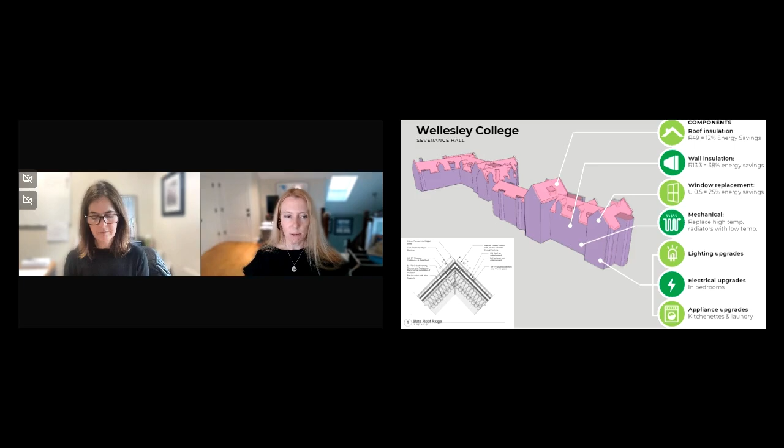So we broke the envelope down as a part of this study, and other aspects of the building, into particular components. We developed an approach and said, what if we upgraded the roof? What if we insulated the roof? What if we insulated the walls? What if we replaced the windows? What about mechanical moves, which we'll talk about a little bit later? Electrical upgrades, appliances, all these questions in terms of energy inputs. We developed sets of details and approaches to these questions, which were then taken to a CM and looked at in terms of price. And we did a whole life cycle cost analysis to try to figure out what gave the best return on investment in terms of energy use reduction versus cost.

So what we ultimately ended up deciding was the best approach, based on a whole life cycle cost analysis, is what you see here on this slide relative to envelope. There were really two big keys to this. The first was about insulating at the walls. We should be really clear that this was insulating at the interiors of the walls, because of course these are historic buildings, so we couldn't modify the exterior appearance. We can't overclad these buildings, and we can't strip off the existing envelope and change it. So we were working on the inside.

And the other piece was looking at the windows. The age of the windows and the type of the windows meant that replacement was going to be extremely expensive on a per window, per square foot basis, however you looked at it. We determined that we could get a lot of value out of window repairs, sealing at the windows, and installing interior storm windows. That really greatly reduced things like our air infiltration, which is one of the biggest places where you lose heat in a building. All of those things together enabled us to create a 43% decrease from the median dormitory energy use as a result of these efforts.

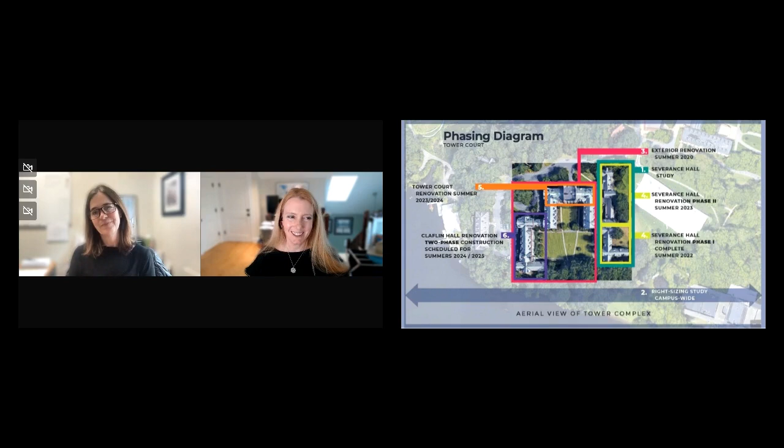As Michelle intimated, there was a lot of work that had to be done in a very short period of time, twice, right? So we had to deoccupy the building, work on the building, get the heads back in the beds. And the work that was done was very varied and touched every aspect of the building while still not being a gut renovation.

It's a lot of late nights and a lot of effort, but in the end, you do get through it. We also, at Severance in particular, of course, there's all the work at the interior.

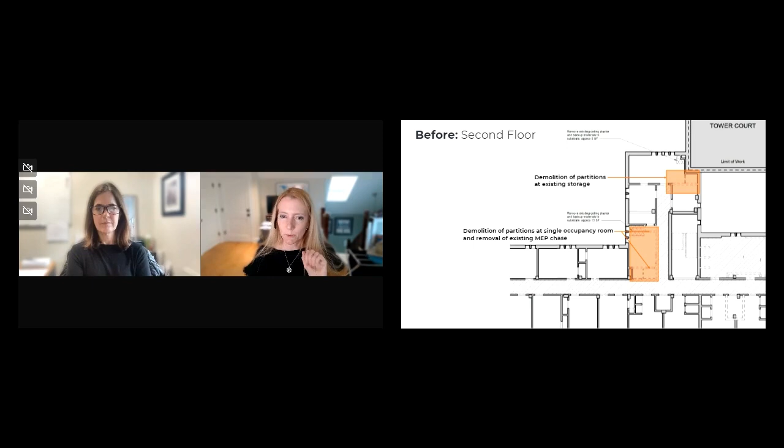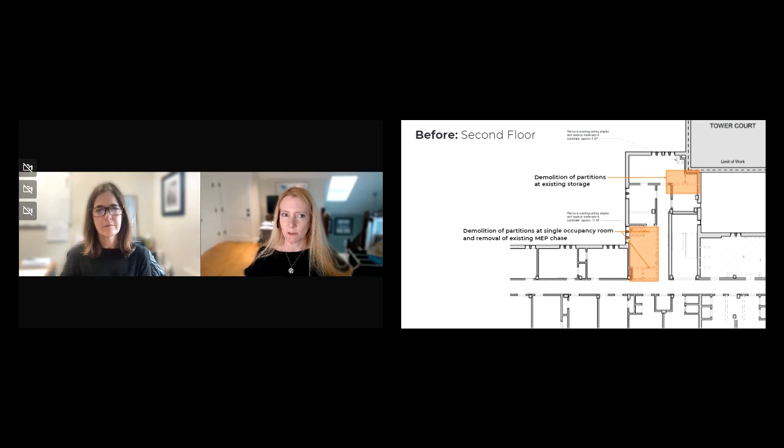While we were at it, you may have noticed there was that last little bullet point on the deferred maintenance slide that talked about the goals Wellesley had for these projects. One of those goals was, where we can do it, let's make program improvements, right? That wasn't the driver for these projects. The driver is things like energy, deferred maintenance, accessibility. But through a little bit of creativity and looking at occupancy, which we'll talk about later, you start to make small design moves that do change aspects of the building.

So you have to imagine that this space is just blank, right? You have this long corridor one way and a short corridor another way. And all of a sudden now you have an open space where students can gather, and it's a little relief valve from this kind of long double-loaded corridor, which really just has to do with how the building is constructed. It also brings light into a space which otherwise wouldn't have as much light. And in the same vein, we always were looking for these little moments—where can we make change?

So for instance, at the first floor, there was a space that was no longer utilized for what it had been, which is this former residence director apartment. There's been a change to how Wellesley handles residence directors, so this space was literally unused. And when we were thinking about res hall rooms, this didn't seem like a very good spot to put a resident because it's literally in the path of travel of all the folks who are coming into the building, who are the residents and visitors.

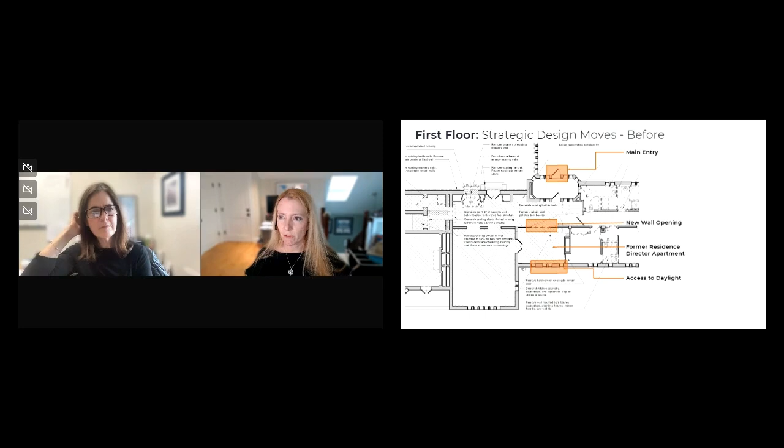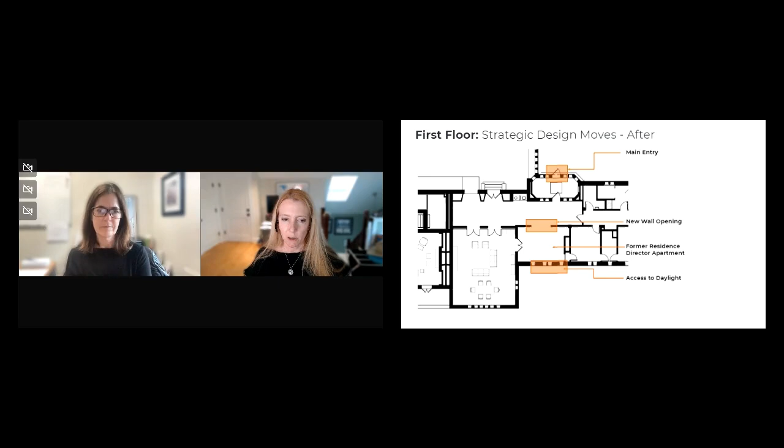We saw an opportunity to create access to daylight, because before when you came in, it was all dark. So now, through capturing this space from the former director's apartment and a new wall opening, we were able to create access to daylight and a very different feel. This is what it was like when you came in the door before - you looked, and there was the morning room over there on the left, but it was very dark and closed in. Now when you come in, you have access to a space where students can hang out, and that space has access to daylight. This was not a lot of work to do, and it fit within all of the other deferred maintenance and accessibility goals and really made a big impact in terms of the student experience.

Another big impact for us was how we were going to address accessibility, ADA accessibility. For folks who may not be from Massachusetts, our governing regulatory agency here is called the Massachusetts Architectural Access Board, or MAAB. They recently adopted a process where they'll work with campuses, places that have housing across a large piece of land, and create a housing plan that can address accessibility at a more macro campus-wide level rather than building by building. This was a game changer for our 10-year plan that we were putting together for residence halls.

Every other time we had tried to tackle the problem of upgrading our residence halls, because they're so old, because they're architecturally really interesting but very difficult to make accessible, the cost just kept increasing, and we had less money to do deferred maintenance, and all it was becoming was accessibility, which is not a bad thing. But again, in these balancing priorities, we just couldn't seem to create a plan that was financially feasible and giving a level of upgrades that would really make an impactful difference.

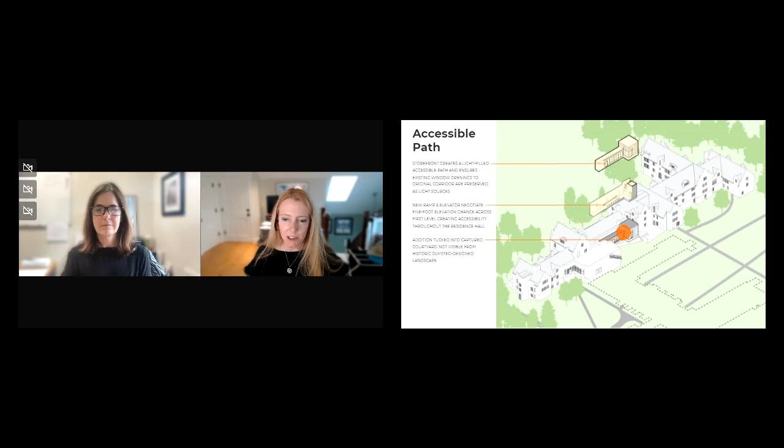The way we approached it was through the creation of a small addition tucked into this little spot, hidden within an interior captured courtyard. This courtyard is what it looked like before, between Severance Hall and Tower Court. This is a spot that unless you know how to get to it, you wouldn't necessarily ever go there. So this became the perfect location to create something that could bridge the gap between these two sides.

Again, this is the northerly end, the southerly end. You get a sense just by the heights of the buildings here of how much topography change we're talking about navigating. So we created this small addition that got you to an elevator that navigated the difference between the location where you come into the building and the southerly wing.

It had a lot of benefits beyond simply creating accessibility, because this corridor was still going to be the main way through the building and between these two wings. Locating ourselves next to it created about as universal an experience as you can get for someone who's mobility impaired versus someone who's walking through this corridor to another set of stairs, because you go through the same archway.

You can see how we navigated this. We removed a couple of different sets of stairs, created a new one, and then created a ramp that takes you over to this end of the addition where you get to the elevator. So you have to be really, really creative with these moves in existing buildings when thinking about accessibility. But there's always going to be that one piece that unlocks the puzzle, and this was the piece that unlocked that puzzle at Severance.

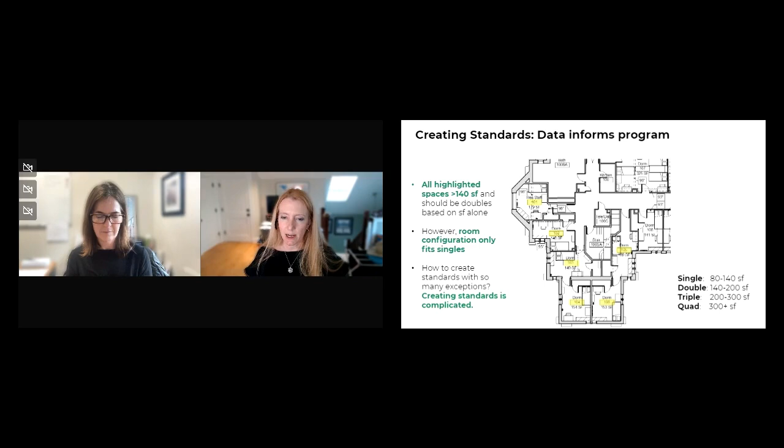And so we wanted to say, okay, how can we really make this happen? So to understand that, we began by literally going into every single room in every single residence hall on campus and understanding the existing conditions. We highlighted, where are there risers for MEP systems?

Where are there radiators and different heating units that bump out into the room? What about furniture types and how they affect things? And funny existing conditions such as head height in rooms, for instance, varied a lot because you sometimes had sloped rooms, sometimes you had turret rooms, sometimes you had shorter dropped areas down at the windows for bays. So we had to catalog all of that. And we recorded all of that information on plans and laid all of that out.

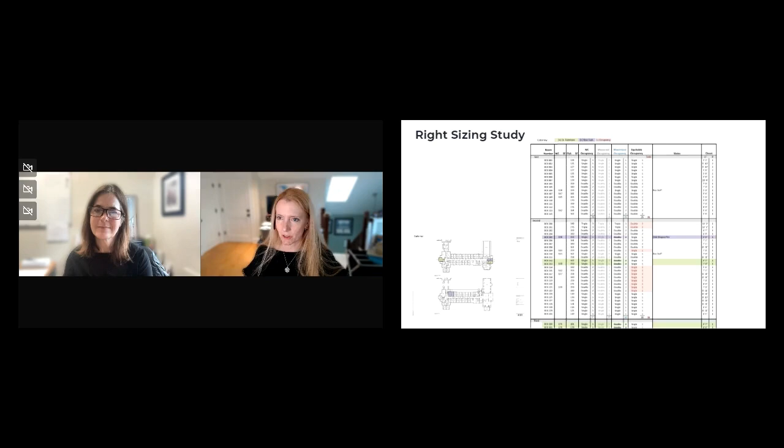But additionally, we then ended up creating some of the world's largest spreadsheets that listed occupancies for all of these rooms with different aspects to them. So for instance, how many students could you put in this space with the constraints using the existing furniture types that Wellesley College had purchased and was located there at the moment?

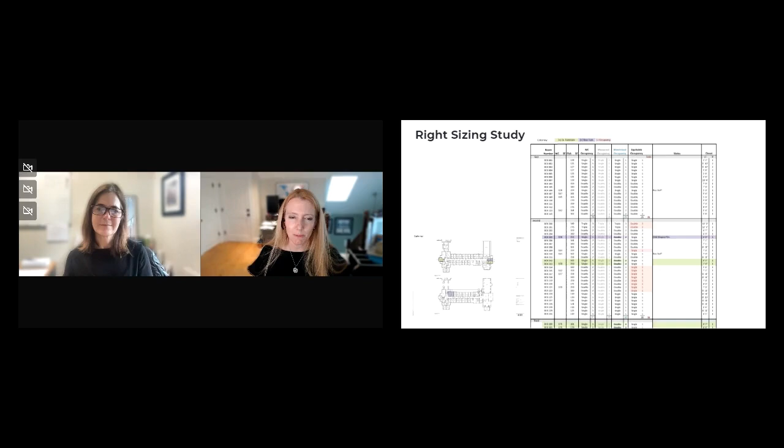What would happen, as Michelle was mentioning earlier, if you were able to loft the beds? Suddenly pushing a dresser under a bed makes a huge difference. All of a sudden that 20 square feet, it's like gold, in terms of trying to think about occupying the room differently. So what does that mean for the occupancy? And so for instance, we went and said, wow, if you really did that, you could really maximize the occupancy. Maybe the campus could actually gain beds.

Oh, but wait. Then we had to think of other things. So after we went through this exercise and created these new room layouts and said, okay, here's with new furniture, here's what it could look like, isn't this great? So for instance, imagine the ripple effect of, say you have a bunch of doubles that used to look like this and you make them triples. What do you affect? Well, you have code issues all of a sudden.

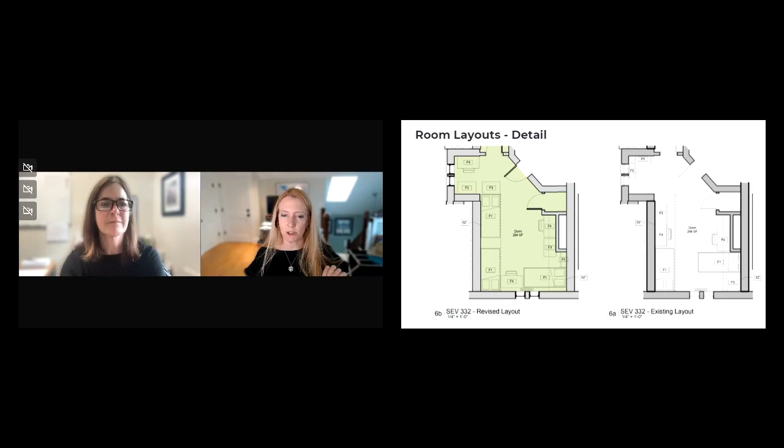Because suddenly we realized that while we could gain beds, we had to think about the number of bathrooms and plumbing fixtures that we had available to students. And we had to think about it on a per floor level, not just a whole building level. So for instance, we had buildings where the total count would work, but it didn't work by floor. So we had to drive all that information back into our analysis and ultimately come up with 3 approaches and understandings of how you could occupy the buildings.

There was this maximization, absolute maximum count with room configuration. Again, to Michelle's point, we weren't moving walls, we weren't changing configurations, right?

There's the historic, which would be, for instance, a grandfathered occupancy. Because some places like the plumbing count don't meet current code, but unless you go through and completely get rid of the building, that's fine, right? You can work with what you have.

And then there's the equity, that question of making a more regular approach to the rooms across all of the res halls. So that led to a different set of floor plans and a different approach to furniture, which hopefully keeps being come back to.

So for instance, when we started the Severance project, as Michelle will tell you, we looked at floor plans and said, okay, what does this housing study tell us? Where would we potentially make moves? Where could we shift beds based on the information that we gathered?

So that we try to adhere to these new standards that we have all created together. One of the interesting intersections is looking at code, equity, accessibility, and frankly scheduling. We talked earlier about how difficult it is to do this much work in a summer, so it's how all these things come together in your micro planning.

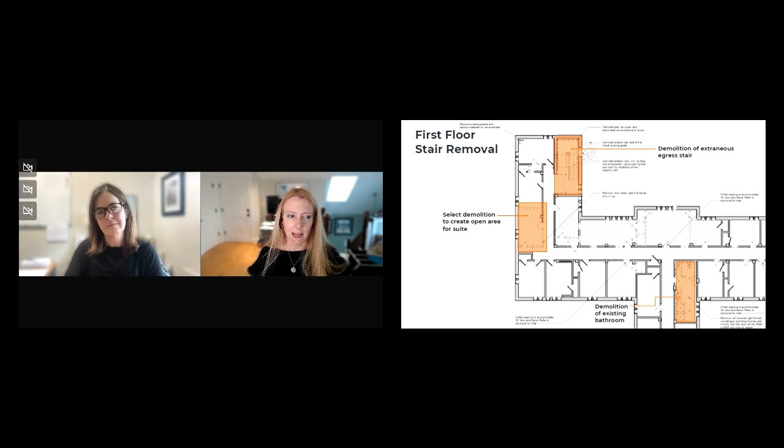We discovered we had an extraneous egress stair, and we discovered we could demolish a room in this area and create an open kitchenette, shift the res hall room to this spot where the stair was, a new dorm room over here, a new bathroom here, and the smallest move of all, a door.

The door got us the distance to the stair that remained, and the door created a suite, which was something that didn't exist in this neighborhood. That was an interesting opportunity to create another housing option for students that they didn't have. It wasn't absolutely part of the program, but it fit that small move of a little extra benefit to the project.

All right, so we have thrown an awful lot at you, and we want to leave some time for questions. Let's try to leave you with some takeaways. What we just gave you was the example of four different campus priorities for Wellesley College, but I encourage you all to think about your institution's values and missions and create your own priorities, because you're going to have more than what you can do.

So pick a number of them. Don't try to pick all of them. If they reflect your values and missions, they'll be the right ones. To get started, a study is imperative. The small amount of time and money you'll spend in planning will be worth its weight in gold when you start to implement. I can't emphasize that enough.

The studies really help you align the actual project scope and details back up to those priorities that you set. And when you keep doing that, aligning and trying to get the right scope, because you're not going to be able to do it all, to reflect those priorities, we've found tremendous success in our leadership supporting that because they can see the mission it's serving.